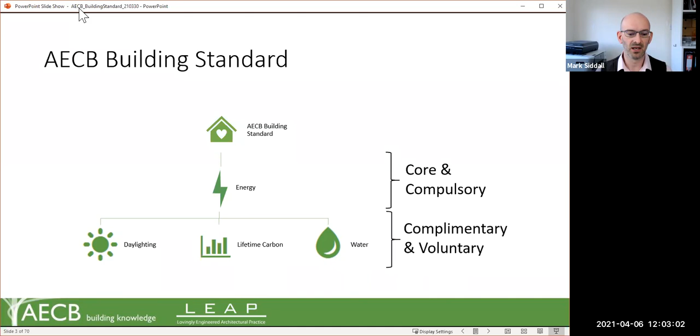Okay, so the building standard itself is an overarching umbrella, should we say. There's a core part which is compulsory, and that relates to energy. And then there are complementary and voluntary sections that deal with water, lifetime carbon, and daylighting.

In terms of the AECB building standards' history, we can go back as far as 2005, when the energy standards were first published under the auspices of gold and silver standard. In 2007, the AECB ushered in Passivhaus to the UK and updated the standards accordingly, introduced the water standards in 2008, and then went through a few tweaks and changes.

And then in 2020, we drew together a number of different things that were in the background and had been underway, which brought the water standard to a clearer prominence as part of the AECB building standard itself, along with daylight and life cycle carbon.

So the question here would be, which of these buildings are AECB building standard, or Passivhaus, or anything else you might care to respect? There's new build, there's existing retrofits. All these kinds of buildings have been realised to the AECB building standard.

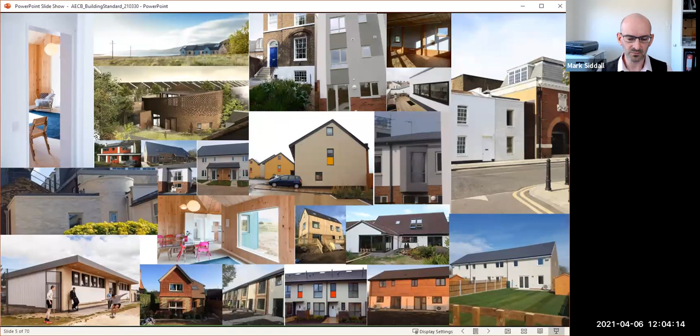The energy standard itself breaks down into some fairly straightforward and simple metrics, and underpinning all of this is actually intention to and consideration for health and well-being, air quality, comfort, and the likes. But it can be distilled into these key headings here.

In terms of delivered heat or cooling, following the Passivhaus methodology, we're basically relating the specific heat demand or cooling demand to less than 40 kilowatt hours per metre squared per annum. Now, in the UK climate, I hasten to add, we don't really consider that cooling should be a necessity, though in certain building typologies it may be, and therefore we're keeping that window open. But the majority of the time, mechanical cooling at least shouldn't really be something that we're concerned about.

Primary energy demand, well, I'll touch a bit more on that later. There's primary energy demand or primary energy renewable, and this varies related to the building standard itself, and over time, because different locations, different countries have got different targets, so that all ties in with the use of PHPP, the Passivhaus Planning Package.

In terms of new build, we're talking about an air tightness target of 1.5 air changes per hour at 50 pascals when we're using MVHR. And well, currently there's still some tolerance here for the use of MEV with a slightly higher leakage of 3 air changes per hour, though we'd argue that really these days AECB members should be trying to target the 1.5 on all projects.

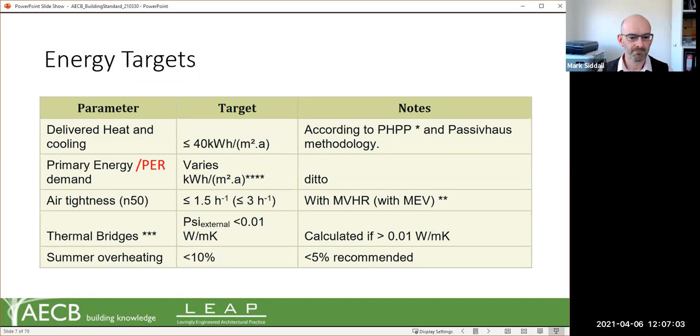Okay, so you might be wondering, what does this look like? How do we deliver an AECB building standard building? What kind of specifications might we be focusing on here? So this table sets this out.

What we have is we've got an MEV strategy looking at the columns. We've got an MEV based strategy for a semi-detached property, an MVHR, two MVHR strategies with an air tightness of 1.5, and then we've got some terraces here as well. So I thought these would be useful and give you some strategic insight in terms of the kinds of specifications that you might end up with. But of course, this is sensitive to your particular design, depending on how your form factor, the surface area to floor area ratio, that is, and also the amount of glazing that you might be including, etc.

So right, to focus on the MEV based strategy here, what we can see is that we've got U values in the order of 0.1 for the roof, 0.08 for the walls and floors, 0.85 for doors and windows, with our psi values, thermal bridging coefficients, all being satisfactory. The specific fan power of the MEV system is less than 0.35 watt-hours per meter cubed, again tying in with Passivhaus kind of approaches here.

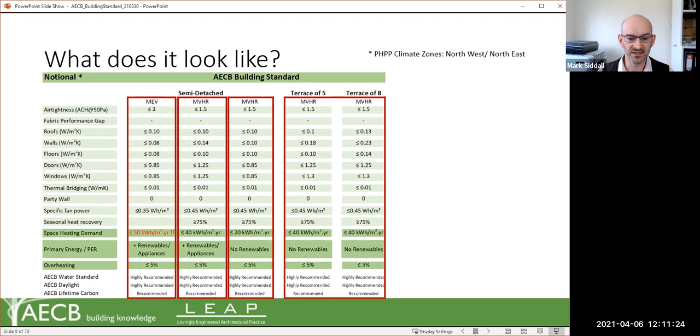Okay, so in terms of thinking about the PER strategy, obviously we can introduce the water standards, because the water standards are focused upon domestic hot water use, and therefore we end up with less energy being used from that. We can also include drain water heat recovery, again, quite a neat, tidy, passive approach. And then we're starting to think of best-in-class appliances rather than thinking about renewables up front.

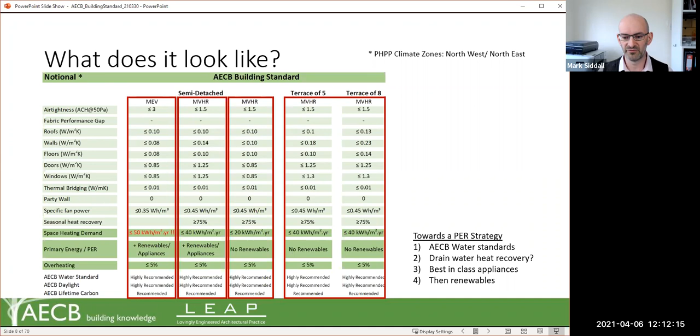Yeah, this is a more sensible approach, because it's a lot more cost effective to introduce energy efficient appliances than it is to install renewables. Now, this obviously gets into certain situations or conversations you might have if you're providing social housing, but in terms of best practice, this is kind of a bit of a hierarchy that we tend to think about.

Okay, so why would you want to build to the AECB Building Standard? Well, quite frankly, not everybody is brave enough to start off with a passive house straight away. I've designed plenty myself, but working with clients that have worked on AECB Building Standard projects, there's certainly that hesitation that can arise for a range of different reasons.

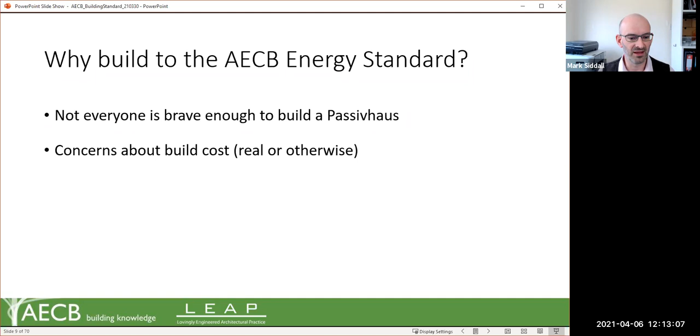This can relate to real or otherwise concerns about build cost. We know that passive house buildings don't necessarily have to cost a great deal more if we're talking about residential, and there's some great information from the Passive House Trust on that. But the AECB Building Standard offers that backstop, which can be a bit more reassuring to those concerned about costs in those ways.

There's also a lower cost of certification when the architect, designer or engineer undertaking that certification work is part of the design team. If you introduce an external certifier, then there are going to be similar additional costs to that of certifying a passive house building. The AECB Building Standard also works as a very good near miss.

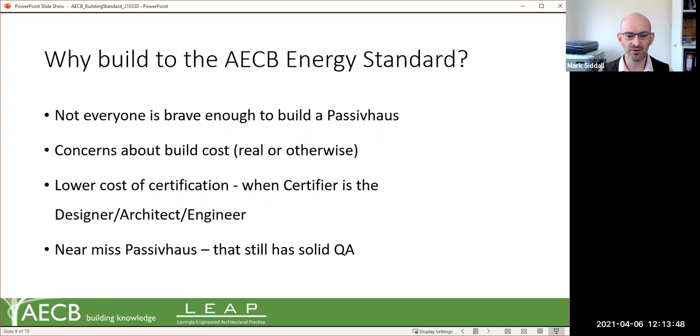If for some reason you haven't hit the air tightness targets you were aiming to achieve, or there's thermal bridging or specification changes that might have happened, then perhaps the AECB Building Standard becomes a fallback position that could be adopted.

Also, you have the scenario whereby you've got a bit more flexibility in terms of design. The space heating demand is a less strict target - it's somewhere in the range of typically between 15 and 40 kilowatt hours, though we could argue that because it's less than 40, technically passive house falls within this remit here. So you end up with certain kinds of flexibility that might not otherwise be the case, and that might be beneficial when dealing with certain cost concerns or particular contractors, perhaps.

The relaxed space heating demand target places greater emphasis upon designing the PER, or primary energy renewables, in an appropriate way, and allows more focus to be placed upon efficient appliances and renewables in that regard. I'd argue that we want to be keeping the space heating demand down as low as possible, nonetheless.

In terms of air tightness, one of the concerns that often gets flagged up by contractors not familiar with building very airtight buildings is: how airtight should we be building, and how can we do it, and will we achieve it? They're concerned about liabilities that could arise from that. So the more relaxed air tightness targets can be somewhat reassuring to contractors.

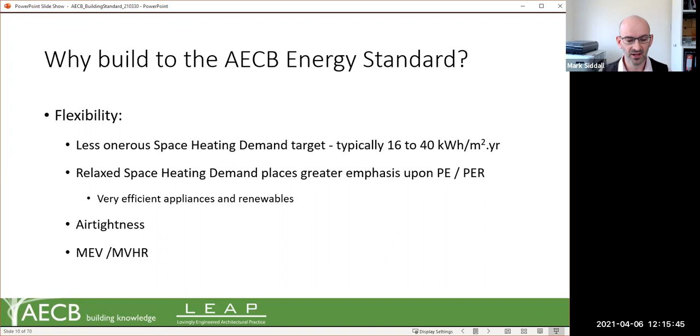And then, of course, from the specification point of view, there's flexibility in terms of thinking about ventilation strategies, whether you're using mechanical extract ventilation or mechanical ventilation with heat recovery.

Finally, when we compare a lot of UK development, UK homes to houses elsewhere in the world, UK houses are smaller, and therefore there's a more challenging form factor. What that means is that we can end up needing to put more insulation onto the building than may otherwise be the case elsewhere in the world, where the houses are that much larger. This again goes back to achieving the space heating demand target.

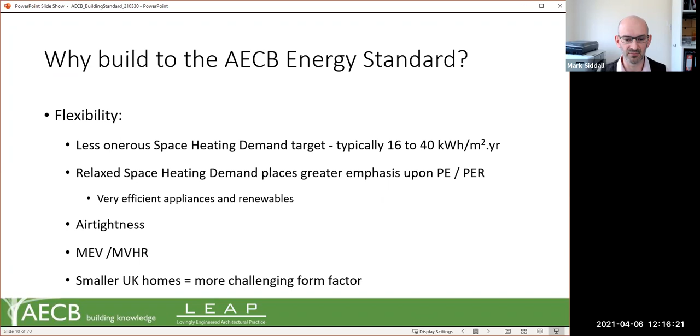Some critical questions that crop up from time to time when we're answering technical queries are: what are the boundary conditions, and how do we set up PHPP, the Passive House Planning Package, in the right way?

Just as background, if you're not familiar with PHPP, this is the design tool used when designing an AECB Building Standard project or building, and it's also used for Passive House design. It sets all the context and boundary conditions so we can close performance gaps and deliver buildings that perform as expected.

There are a couple of different toggles on the verification worksheet. For an AECB Building Standard project, we set it so the PHPP looks at the project as a PHI low energy building. This is important because it impacts the primary energy renewable options selection further on.

We have it as a classic class, should we say. We're not looking at premium, like Passive House premium. We're just leaving it classic for now.

Verification of primary energy can go under an either-or approach: primary energy non-renewable, or PER, primary energy renewable. Then, depending on whether it's new build or retrofit, you make the appropriate selection as well.

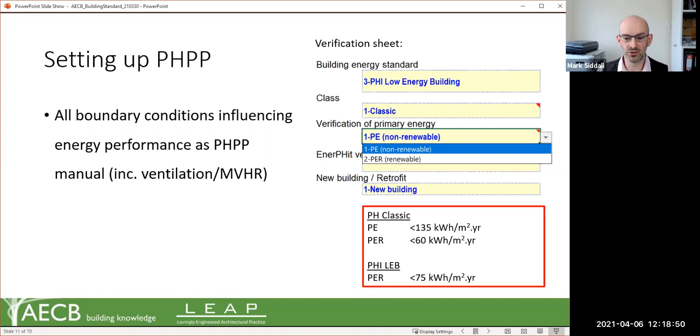We recognize the fabric and relax the primary energy renewables target so we're not forcing projects to have renewables necessarily, depending on whatever specification you've got. It's also worth recognizing that MVHR units that are not Passive House certified have to be considered in an appropriate way.

As per the Passive House standard, if it's not a Passive House certified MVHR unit, you suffer a 12 percentage point performance penalty. So if you've got a 90% efficient MVHR system, you deduct 12 percentage points, making the effective efficiency 78%.

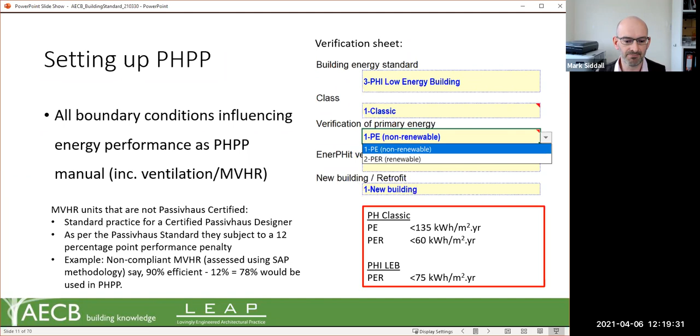There's some great information on the Passipedia website here, so I won't go into too much detail, but basically PER, the primary energy renewable, considers a future state of the grid where we're using a lot of primary energy. That primary energy isn't entirely carbon neutral - there are costs and inefficiencies in the system, and primary energy renewable takes this into account.

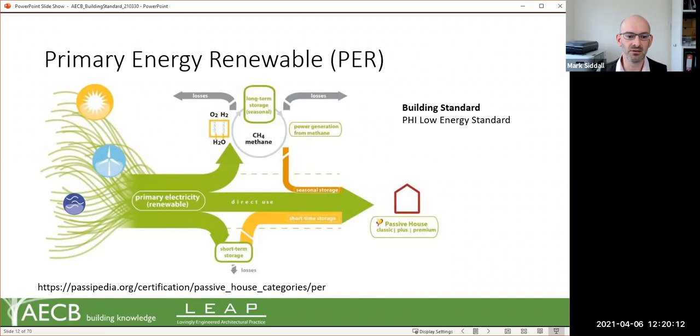Within the AECB Building Standard, just like Passivhaus, we're designed to recognize comfort - ISO 7730, considering radiant comfort, risks of downdrafts from windows and radiators, etc. Stratified air temperatures are also another consideration, which is why we want to get the window specifications and heating strategies right.

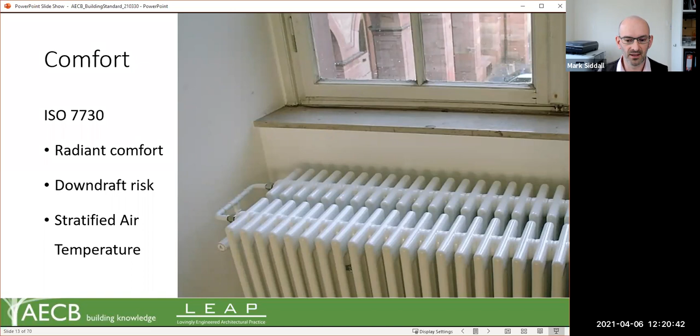So the next question ends up being: what U-value should we be targeting? Do we need to put radiators underneath the windows? And what about curtains and shutters?

On the next graph, I'll show you how we can think about U-values that tie in with comfort. In terms of radiators, you can put them below a window, but we don't need to - if we've designed adequate windows in the first place, we can put them elsewhere in a dwelling. Curtains and shutters are transient in use; we don't always know they're being used, so we don't consider them as having an impact on thermal performance from a space heating demand perspective.

So when we're thinking about a window U-value, you could use this graph. This is something I actually worked out a number of years ago, based on the paper written down below.

What we can do is, looking along the horizontal axis, you can look at the height of the window, and on the vertical axis we've got a range of indicative U values.

The orange, blue and magenta lines indicate external design temperatures that you might be considering. So we've got something going here from minus 10, minus 5 and minus 15.

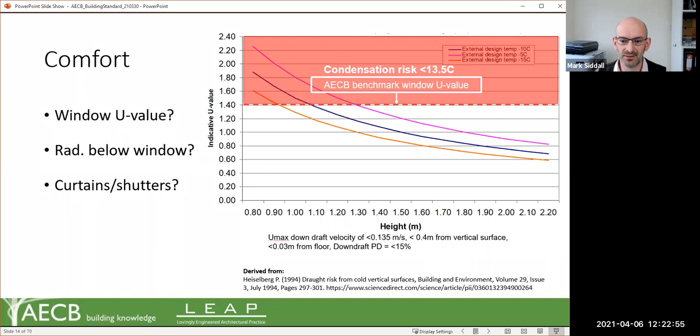When you're making a submission for the AECB Building Standard, there is supporting evidence that's required, and that's all down on the website, as you'll be able to see. If you follow this, type this link in, or if you follow one of the links that James will have put into the chat...

...you'll be able to find the guidance notes telling you what information should be submitted as part of your AECB Building Standard submission.

Who can certify your project? Well, basically, so that we know people have got the right kind of knowledge and understanding, we're talking about certified Passivhaus designers.

You might go to Passivhaus training, for instance, and train up to become a certified Passivhaus designer. If you're an experienced certified Passivhaus designer, you may be on the Passivhaus Institute's register...

...but you may also have experience and not be registered, and that's okay as well. We're not necessarily looking for that at the moment.

Many of the people that are able to certify a project are members of the AECB. So if you're looking to find a certifier, I'd strongly suggest that you go and have a look at the members directory and look for somebody in your region.

Who can design your project? Much in the same way, ideally people that can demonstrate experience with working on AECB Building Standard projects. Again, certified Passivhaus designers are a good fit here, but they don't need to be...

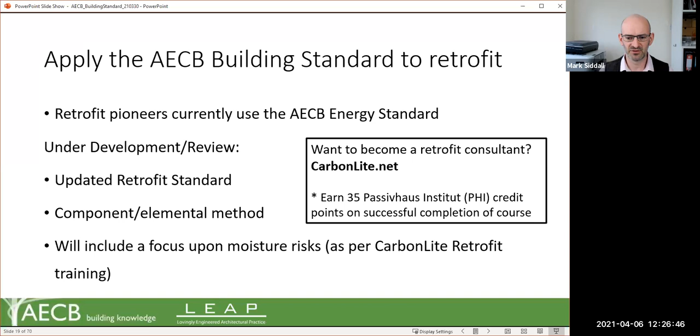Extensions and additions. Basically, these shouldn't be considered in isolation. We should be thinking about a whole-house retrofit plan, and where appropriate, this is a more considered and responsible approach.

Every project should be considering a retrofit strategy if you're extending a building.

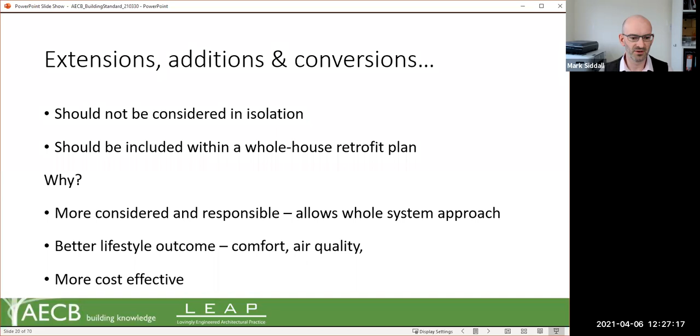Also, it's more cost effective as an approach. Certification costs and modeling - basically, there are different strategies that you could adopt, or your certifier could adopt.

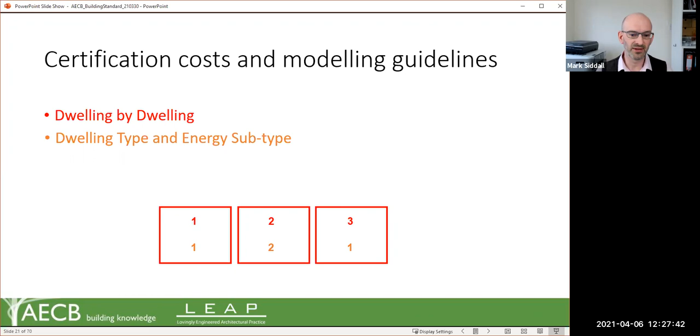One approach is the dwelling by dwelling approach, and this tends to work out somewhat more expensive because you're certifying each individual property. You need to take those dwellings and break them down into an energy subtype, because we might have end terrace units and mid terrace units. Technically we might think of them as the same house type in terms of floor plan, but they've got different characteristics in terms of energy use. So that's why it can add some additional costs.

Building by building, if we create a strategy whereby we're looking at the whole building - this could be flats, for instance - then we would certify the whole building rather than each individual flat, or we could certify an entire terrace as a building rather than individual dwellings in that terrace. This is a lot more cost effective, and it's a strategy that's normally endorsed and supported by Passivhaus certifiers. Given that we're working in keeping with that methodology, this is a sound approach, and it's what we would advise.

But we also know that some people like to certify on a dwelling by dwelling building type approach, simply because they might then have commercial value in terms of selling each individual plot with its own certification, for instance.

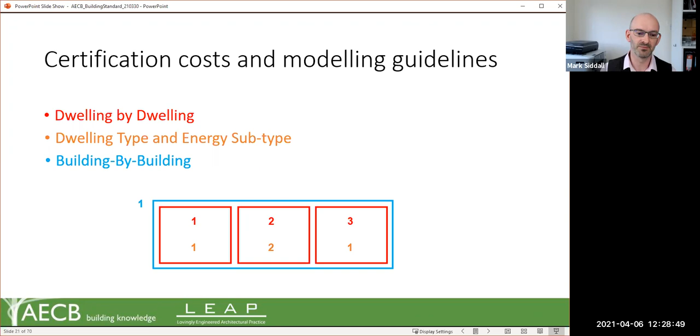Certification costs for clients - basically the AECB certification fee is not a total fee. If you go on the website, you'll see that that's not the total fee. That is basically the fee for getting the certification registration process completed.

There are additional costs that a client might face because there's obviously time that goes into building a PHPP model, informing the design development process, supporting the trades on site, site inspections, etc. Which is why we strongly suggest that you use a member of your design team as your certifier, because they'll be doing a lot of these things as part of their natural process as your architect or engineer, undertaking site inspections and things. To split it out and have an additional party involved does add more cost than you might necessarily have been thinking about.

The AECB Daylight Standard integrates fully with the AECB Building Standard, because basically what we're doing here is helping to focus on winter well-being, reducing seasonal affective disorder. We're thinking about getting good standards of daylight, not overglazing a window or building, which can result in overheating risks. And we're also avoiding glare, gloom and discomfort from that, whilst controlling and limiting the amount of artificial light that would be used throughout the course of a year.

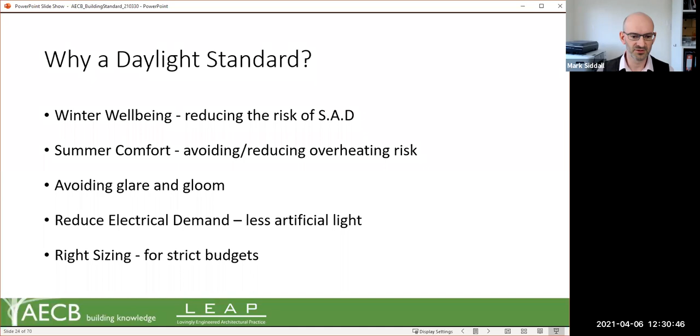Another key thing is to recognise that windows are often more expensive than wall, so right sizing of your windows works well for budgets. If you've got a strict budget, the daylight standard works well in that respect - you know that you're not going to be providing too little daylight, while also managing some of these other issues as well.

Daylight factors themselves are relatively quick and simple to calculate. Daylight factors were first developed in the UK in the 20th century, and it's basically a ratio between the amount of illumination outside and the amount of illumination that gets inside.

They're quite straightforward. There's a range of different tools available that can calculate daylight factors, some of which are listed here - Dialux is one example. It's a static measure; it doesn't take account of orientation or time of year necessarily. It's basically working on a standard overcast sky, and then working things out relative to that.

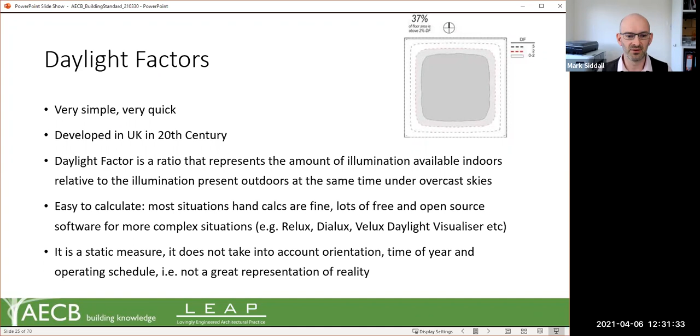There are several ways to calculate daylight. There are advocates, and many would say that daylight factors have limitations, and they do. But for domestic purposes and for the speed of iteration, it's generally found that they're quite useful.

When designing with daylight, we can consider direct daylight, but direct daylight can be annoying in some circumstances when we're trying to work, though it can also be quite pleasant when relaxing. So we've got to think about the kind of lighting that we're going to be creating in a particular property at a particular point in time.

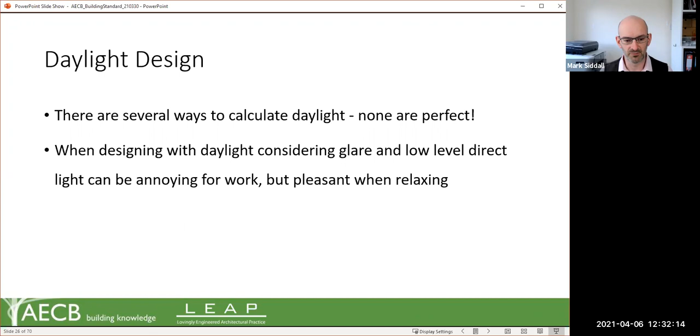In terms of daylight modeling, you're only as good as your inputs, so making sure that you consider things like external objects, the true size of glazing, not just about structural openings. So your glass area, the solar transmittance of the glass, and the reflectance internally are also all key characteristics that we need to consider when we're developing a good design.

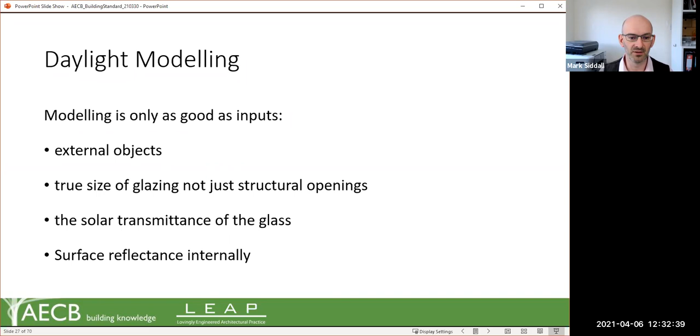That's where the AECB daylight standard kicks in as a steady state model, a simple spreadsheet in effect. It's based upon BS 8206 Part 2 and informed by various other bits of guidance from the BRE. What we're looking to achieve is adequate daylight for around about 70% of the year, and acceptable daylight for 80% of the year, roughly between the hours of 10 AM and 2 PM. So that's at the end of the year.

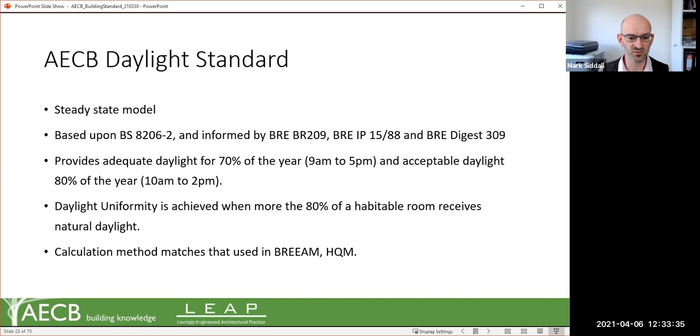Daylight uniformity is something else that's considered, so we don't get gloomy areas at the back of a room, for instance. We're looking to achieve a daylight uniformity of around about 80% here. The calculation method that we're using can also integrate very well with BREEAM projects and Home Quality Mark projects as well, because we're all founded on the same British standard here.

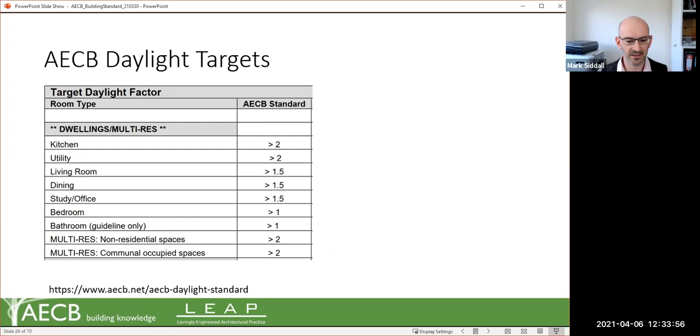What we're talking about is basically we've got different kinds of room type here, and on the right hand side we've got some daylight factors. These are all kept within tables in the guidance note, which you'll find at aecb.net, following that hyperlink down below.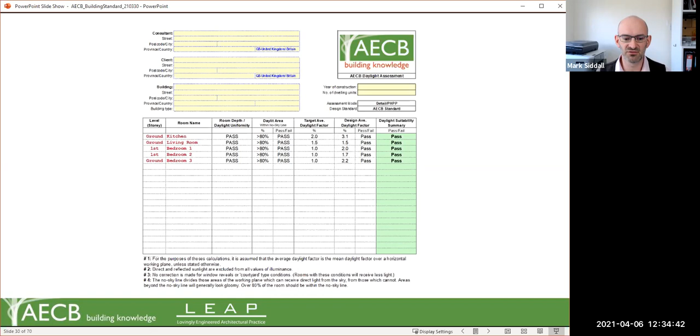There are circumstances whereby this is more of a guidance. The most important thing is that you've actually undertaken the calculations and you have a good understanding of what the impacts are. There are borderline conditions that can arise, and these are something that should be discussed with the client, but it's at the certifier's discretion whether that should be considered appropriate.

So there's a quick start guide approach, creating prototype rooms that are available through the daylight spreadsheet. And then you can refine and update the model using your PHPP as part of your normal workflow.

One of the key things that we recommend is that you calibrate your experience with working with the tool. Go down to site, measure the daylight factors in practice, and start to get your own intuitive understanding about performance here, and also do some long-term data monitoring as well to assess overheating risks, and look for those correlations where you can build your confidence in the approach. But it's the feedback loop which is very important here.

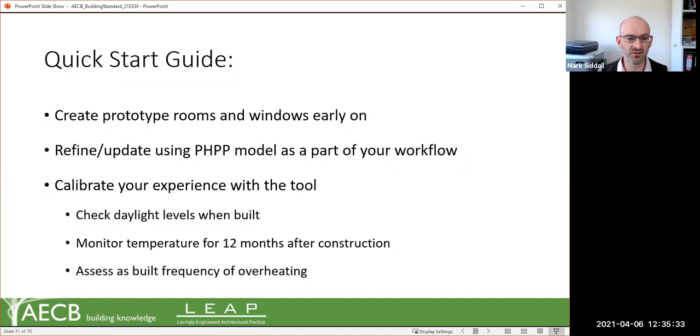In terms of dealing with the AECB water standard, there are 2 volumes of guidance on the AECB website, and you can go through those in your own time. Key thing to recognize here is that hot water is the major concern that we should have from an environmental perspective in terms of its carbon emissions. Basically the majority of the carbon emissions are made in the home from our domestic hot water, not through the treatment process associated with the water coming to our houses.

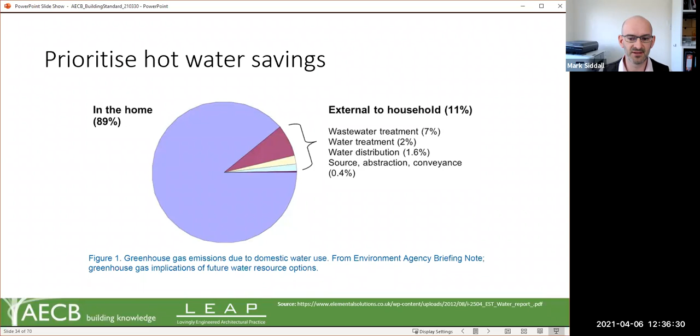Now, we also obviously need to think about the volume, the quantity of water that we're using, but as designers and specifiers, we've only got a limited amount of scope to control that. Obviously, the key thing is people are going to use as much water as they feel they need or feel is appropriate. So what we'd be saying here, this is where it gets back down to thinking about the kinds of fittings that are used, and thinking about dead legs and the likes.

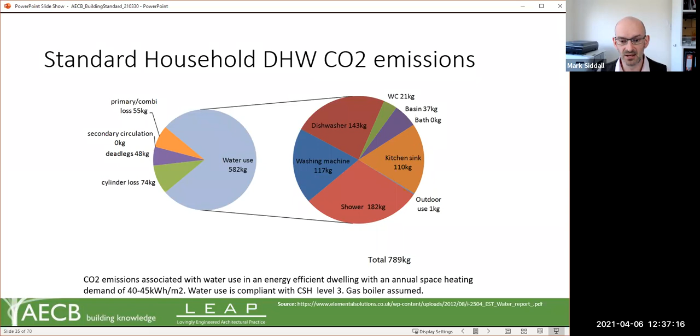So what we can see here is we've got the standard household domestic hot water carbon emissions, and the key thing to recognize here is that we've got water use that happens, and as I say, designers don't have too much control over that specifically. But what we do have a greater influence over is cylinder losses and dead legs and secondary circulation loops and the likes. We can also, of course, be helping to reduce the overall quantity of water that is being used by specifying low flow taps and appliances. But we've got to do this in a thoughtful and appropriate way, so that we're making sure that there's appropriate comfort being considered along that process.

So some work that was done by Nick Grant and Alan Clarke a number of years ago, along with Dr. Judith Thornton, looked at the amount of energy that was being used in dwellings.

What we can see is that there can be some quite considerable losses. We've got the amount of delivered water along this bottom line here, and we've got the useful internal gains that can arise here. We've also got the hot water system losses, which is the key thing we're focusing on.

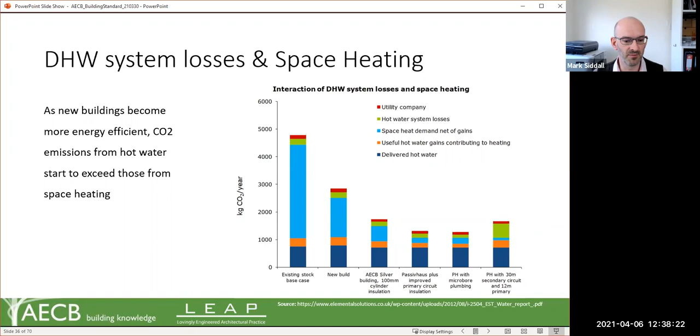That's shown here in green. So there's a lot that can be done in terms of tidying up the amount of energy that's been used, by designing and specifying the pipes, as well as the insulation and the appliances, the taps that are being used in the property.

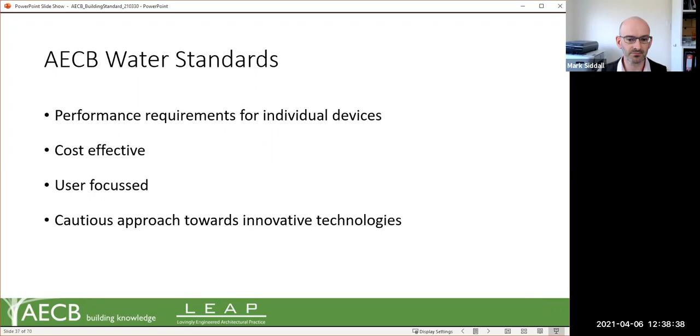So we're not encouraging people to undersize baths, and also we're thinking about the runoff time from a hot water system, storage cylinder, for instance, to the tap. We're not waiting for hot water to arrive for a long time. It should arrive in quite a short period of time.

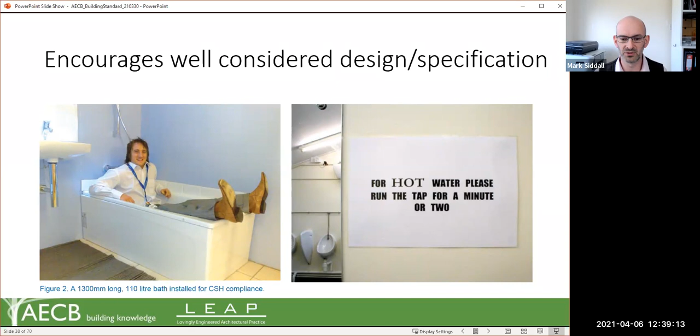And that doesn't encourage you to rip out a tap because you're having to wait for far too long for the water to arrive.

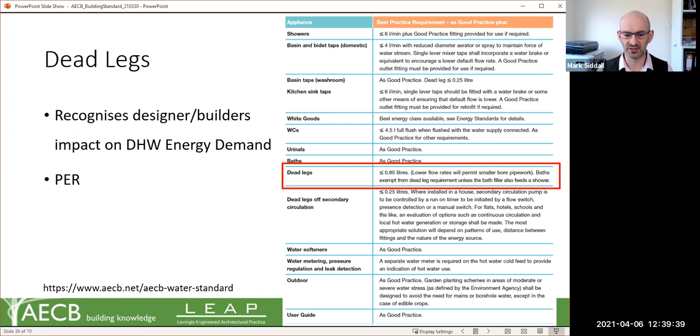Another key thing is controlling the volume of water within a dead leg. All of that heating up that pipe, and all the water sitting in that pipe over a period of time, is also a heat loss, and that's not a beneficial thing to have. So we need to pay attention to that, and that's another factor that's considered.

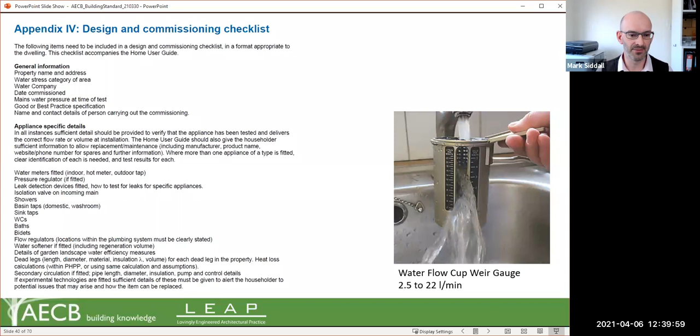This is courtesy of Harry Paticas, who highlighted this in the presentation he did - basically using flow cups, weir gauges, to measure the amount of flow off a tap, and commission the building appropriately.

So it's a quick start guide for the water standards, and thanks to Harry Paticas for this. Basically, carry out the research early, test the water pressure at an early stage, because we want to make sure - there are pressure losses with micro bore plumbing.

Most of the time it's okay. I haven't experienced any problems over the last 15 years or so of using this, but nonetheless, it's something we need to always be wary of, or be cautious. Go and check first. You want to work with a good service engineer or passive house designer that's worked with the AECB water standards before.

Consider the shortest pipe work runs, so thinking about your services layouts. Architects amongst you, if I said design with kind of a shell and core frame of mind, you might get what I mean there - making sure that basically all the services are clustered together and all lined through neatly.

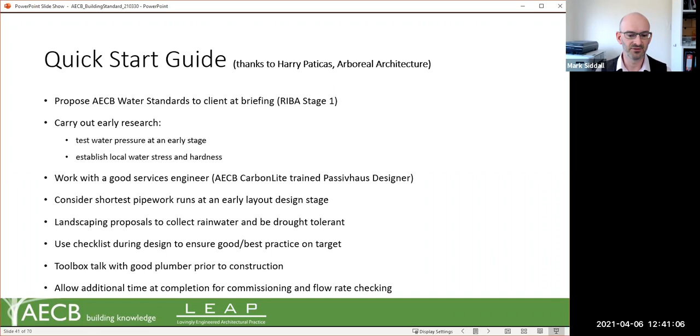Think about landscaping proposals, water butts and the likes, checking best practice to make sure you're on target, so you're reviewing specifications and calculations.

In terms of dealing with the lifetime carbon standard, again, this sits under the AECB Building Standard, but can also be integrated with the retrofit standard as well.

The key thing here is making sure that you undertake two sets of life cycle analysis, looking at the embodied energy and the energy in use, comparing these two buildings, these two designs with one another, and selecting the best practice option.

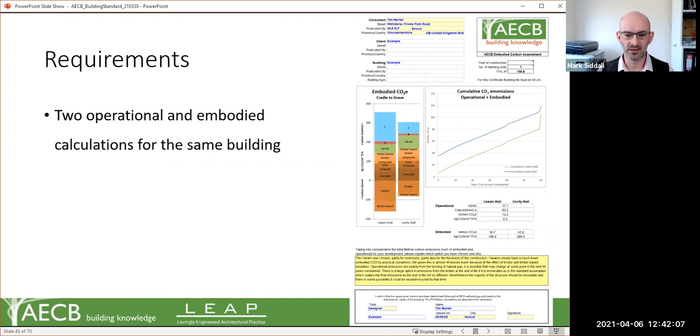We're not setting specific numerical targets at this particular juncture - it's the methodology that we're trying to get embedded. We know that AECB members are obviously much more conscious of emissions that arise through life cycle energy use, and therefore we're currently gathering the data to then set appropriate standards in the future by drawing from that best practice data set.

PHribbon is the tool that's used to calculate the embodied carbon. Again, this uses, because it integrates very neatly with PHPP, a lot of the geometric information that has been entered into PHPP is then ripped through and pulled into PHribbon. So it streamlines the whole workflow and makes the cost of calculating embodied carbon that much less, and simplifies the process at the same time, whilst also helping us as the AECB ensure that the quality is being maintained in that same process.

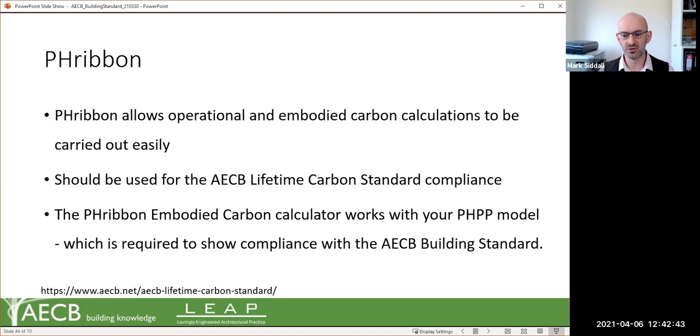If you want to know more about this, then AECB members obviously have access to a lot of Tim's webinars talking about PHribbon, and he's got some real life examples and talks about materials and embodied carbon in the AECB webinar program, which you, as a member, have automatic access to.

In terms of the retrofit standard, which is the new kid on the block, as it were, and as I say, Sarah Price has got an upcoming webinar on this, so keep your eye out for that. But if you are working on retrofit, here's a quick overview. Basically, the retrofit standard has two components, which are core and compulsory.

This is energy and moisture. Now, this is because when we're dealing with an existing building, there can be a lot of existing moisture issues that need to be addressed, and you don't want to do things in the wrong order. So this is where really making sure that your architect, your designer, or whoever, you've got the right consultants on board to help supervise and advise the design process when you're undertaking a retrofit.

Now, sometimes we find that you might also, when you're retrofitting an extension or an addition or a conversion, a loft conversion, for instance, might be part of the retrofit process. And therefore, you can also integrate the water standard, lifetime carbon standard, and daylighting standards into an AECB retrofit process as well.

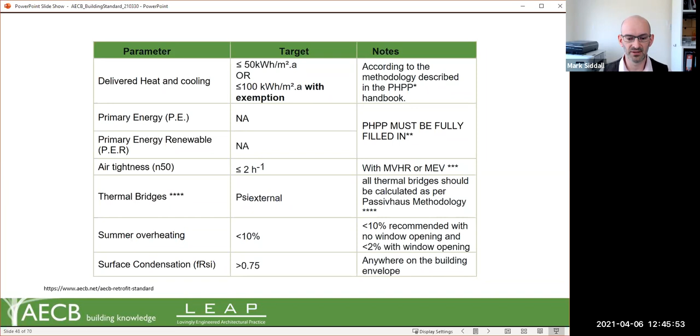We have a series of exemptions that do apply, which is why you might get the relaxation from 50 to 100, and that can be where you've got buildings of specific historic value, or there could be some certain legal requirements. There could be limitations in terms of what you can do practically in terms of thickness of insulation, or there could be fire property, certain properties that need to be considered in a particular way.

Or when you're considering internal insulation systems, moisture robust construction can be important, and therefore we need to make sure that we don't over specify the thermal performance of a particular building. And there may be other compelling reasons relating to construction that could also be worth consideration there.

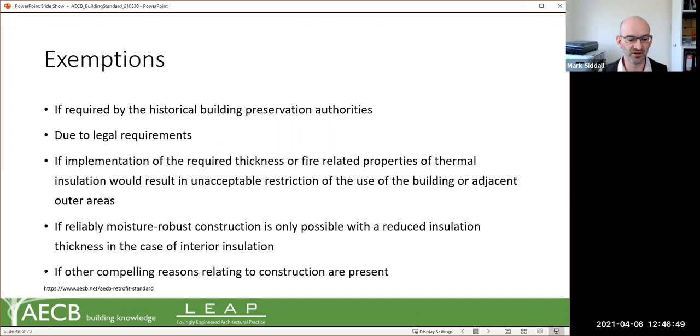So your certifier, your AECB certifier, would be able to make that review and determine what they consider appropriate. And they can always refer back to the technical support at the AECB if they've got particular queries.

One thing to highlight is that a full conditions survey and retrofit risk report should be compiled, and basically there's 2 key sections to this: information from a pre-retrofit condition survey, and then also a description of the pre and post retrofit risks.

So if you commission an RICS level 3 survey, for instance, that would be a building survey, and that would get you your pre-retrofit condition, but the surveyor may not be equipped, unless they're a certified passive house designer or a retrofit coordinator or somebody that's worked on AECB retrofits before. They might not be equipped with the right level of knowledge and understanding to actually anticipate the impact of a retrofit upon the project. So you've got to have these 2 elements brought to bear on any given project.

When we talk about new additions in a retrofit scenario, it's difficult to gauge what the U value should be for the new addition when doing your PHPP. So basically there's an indicator here: we'd expect that backstop would be 0.25 watts per meter square Kelvin.

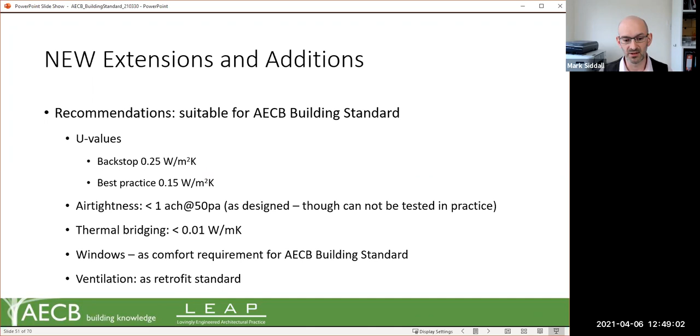But space permitting, moving to a U value of less than 0.15 would be well worthwhile. From a design approach, we can't actually measure it, but we'd support the extension achieving an air tightness of less than 1 air change per hour at 50 pascals. There's no reason a new build couldn't, but we're not expecting you to develop a test regime for that. It's more about how you approach it as a certified passive house designer and certifier, to ensure the quality of the design is in place, paying appropriate attention to thermal bridging, window design and ventilation, as per the retrofit standard.

How is a project certified? As we move towards the end of the presentation, there are different phases to this process. First, we're developing prototype analysis for new build or retrofits and optimizing a design, prior to undertaking a planning application. So there's a bit of iteration going on - doing initial checks, determining whether we're satisfying the performance criteria, and updating the design accordingly before making a planning application.

Next, we move towards a more detailed PHPP analysis that takes on board more detailed specifications, developed prior to a building regulations application for instance. Again, we go through iterative processes to make sure the design is on target.

Then at that building regulations stage, we can go forwards. You develop documentation as necessary to get to the point of going out to tender and building the project. Again with iterative processes, any changes made or proposed should be checked and verified prior to completion, so you can make sure you're on track. But assuming all things are present correct by the end of that process, you can then certify your project.

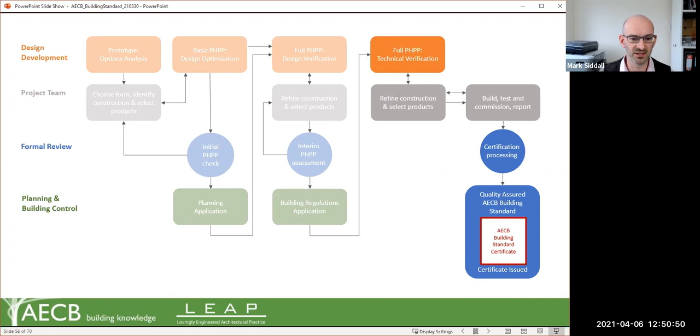Your certifier will then make a submission to the AECB and register the project appropriately. In terms of declarations and submissions, complementary AECB standards that are adopted must be submitted as part of your building standards submission. The verification sheets for each standard must be combined into a single PDF and uploaded as the PHPP verification sheet on the Low Energy Buildings database.

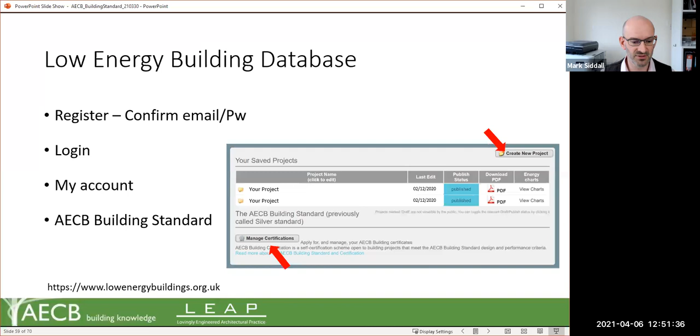If you go to the Low Energy Buildings database, lowenergybuildings.org.uk, that's where we register AECB building projects, whether retrofits or new build. Your certifier will have a login and can register, log in, go into their account and introduce the new project to the database. Once submitted, the AECB central office will send out a certificate confirming compliance, which can be presented to the client.

Challenges in design and build contracts: who should be the certifier, and should the certifier be novated? Arguably, for that to maintain third-party independence, we can ask whether it's appropriate that the certifier should be novated over. Having said that, I have acted as a certifier working under that novated scenario, and a contractor with scruples isn't going to put pressure on people to distort the truth - everyone's focused on trying to do their best. But for those clients who feel they'd benefit from not novating a certifier over, I can understand that perspective.

There are a wide range of choices, meaning the design team could spend more time choosing rather than doing. I think that's one of the issues that can arise with the AECB building standard. Passivhaus is very clear - you've got MVHR, very clear air tightness targets, less flexibility, and those constraints can be very useful. In a scenario with the AECB building standards where you've got more flexibility, experience really comes to the fore, so speaking to experienced consultants pays dividends in this context.